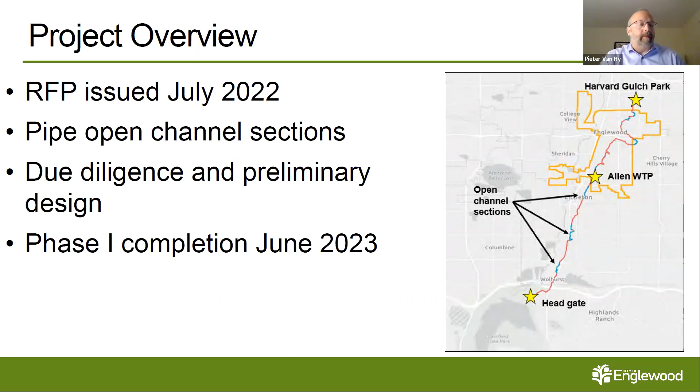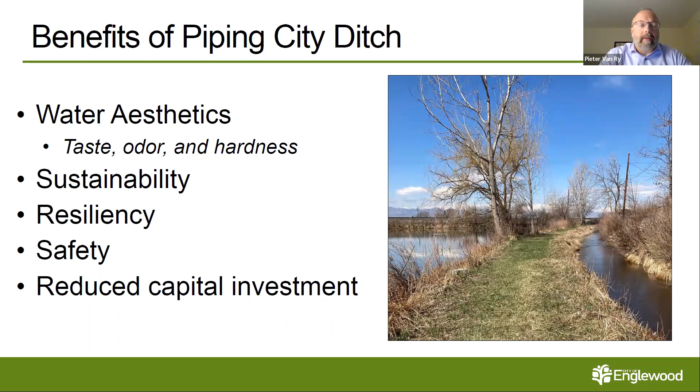Talked about this. So just as a review, it's taste, odor, and hardness, but we also have resiliency, safety, the operational costs, and just sustainability for keeping water in a piped enclosed environment. We lose less to evaporation. So those are the reasons why we're approaching this project this way. Here's what we looked at when we put out the RFP. It's basically nine areas. You can see what they are, but it's generally all the preliminary engineering aspects of a project. So initial alignment, right of way, property, things like that, analysis, preliminary design.

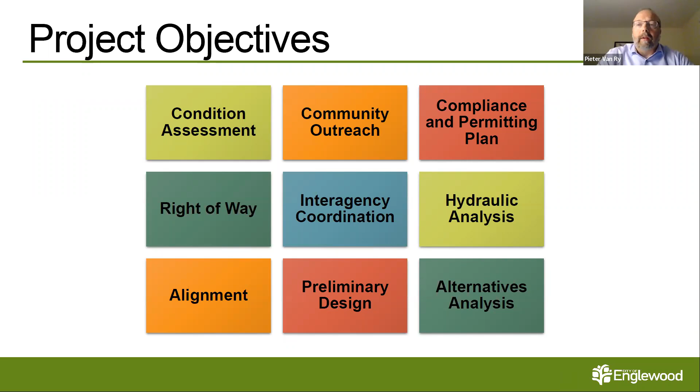But I want to highlight community outreach. So we have had a significant amount of interest in this project since we've talked about it, and so within this process is a number of community outreach meetings to work with the interested parties who would like to provide input on how this project advances. And this is the phase to do that in, as we start to come up with alignment ideas and possibilities for how this ultimately can be constructed to achieve the water supply goal. There could be other options, and we want to make sure that we have that opportunity to talk to those impacted stakeholders, most specifically the historic preservation societies who've expressed an interest in this.

We went through a selection process. Like I said, we did an RFP. We had 6 firms submit, and then we actually interviewed 3 firms. We interviewed Jacobs, Carollo, and HDR, and ultimately settled on Jacobs. They had what we thought was the best project team, best experienced project manager, as well as a really sound approach to how to accomplish this first phase and really look at those alternative alignments.

And they were the team that actually conceptualized the idea that when you go with a shorter straight line alignment, you save the cost of pipe installation, which actually might benefit those that are looking to protect the historic nature of the ditch. So, and I've specifically worked with the PM from Jacobs on a previous project at my previous organization, and it was a large diameter pipeline about 4 miles long, and it was very well executed. So we were comfortable after we went through the interviews that Jacobs is the correct engineering firm to complete this project.

We've also added to the original proposed base price $20,000. And what that's for is we anticipate immediately moving this into a construction manager, general contractor bidding approach, which is a different, we're going to talk about this a little bit later in the meeting.

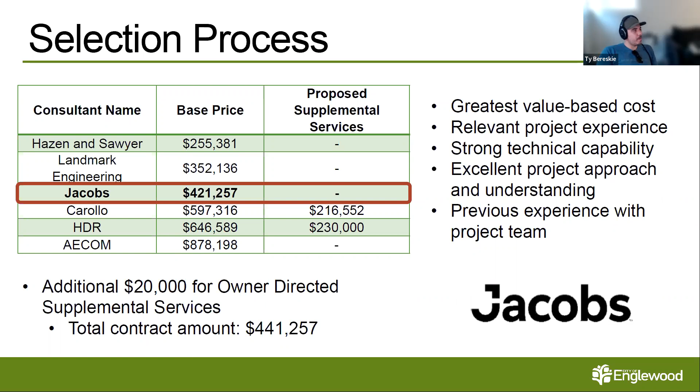Okay, thank you. Another question. I would assume that along the line there'd be some sort of pump stations. I mean, this isn't all gravity, is it? No, it is all gravity. Oh, interesting. Okay. Those are my questions. All right, thanks, Jim. And Ty, you put your hand down. I'm assuming you were asking something similar. Yep, same question. All right, that was mine as well. Any further questions? Okay.

Then could I get a motion to recommend City Council approve by motion a professional services agreement with Jacobs Engineering Group for the city ditch piping project in the amount of $441,257, including approval to execute any change orders to expend a 20% staff managed contingency in the amount of $88,252 for a total project authorization of $529,509. I move. Thank you. Can I get a second? I'll second.

Okay. Any further comments, questions? All right. All in favor, say aye. Aye. Aye. Aye. Opposed? All right. Motion carries. All right. On to item 5B, Peter. Okay, thank you. So this one is, I'm trying to resize my screen here.

So this is our annual process to renew our professional service agreements with Berg Hill, who's our water rights attorney legal firm, and Martin & Wood, who is our water rights engineering firm. And this is essentially what these two firms do, is they protect our water portfolio. And we've been under contract with them for many years. They have the history of our portfolio. And really, this is important for us to be able to, as water becomes more and more scarce, protect and optimize our water rights portfolio.

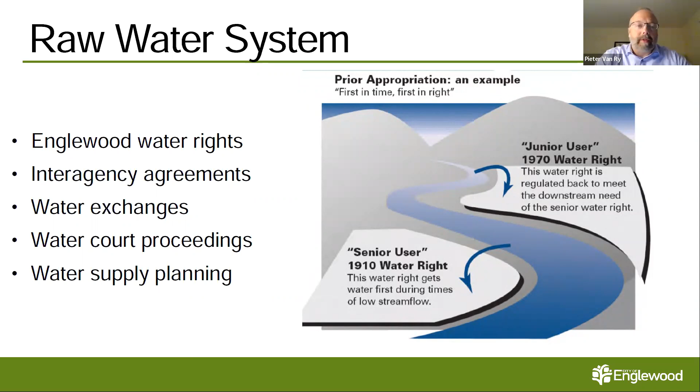So these two contracts are essentially the technical specific firms that work solely in the water rights space to help us accomplish those goals. I think I talked about all this, so we can jump ahead.

So really, why we keep with these firms, there's only so many of these firms in the Front Range, and so once you have a team that you work with, because of the historic nature and the multi-year approach to a lot of these cases and a lot of these issues, once you have a water rights legal firm and an engineering firm, you typically stick with those. It's not something where on an annual basis or every 5-year basis you go back out, because there's only so many of these firms.

And so once you have your team, you move forward as long as the value is being provided to the city. I think one of the things that has occurred over the last couple of years is we've taken a much more active role at the city in managing their work and managing their efforts. I know they appreciate that, because for many years they were essentially off on their own, protecting the water rights portfolio of the city with a pretty hands-off approach to that.

And so I think what it provides for us is a much stronger connection to what the internal staffing priorities and strategies are, with the supplement of the specific water rights knowledge that comes from these two firms.

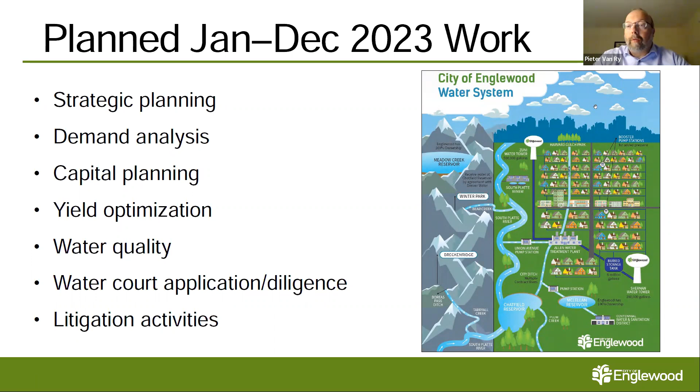So for July through December, we had anticipated 225 for Martin Wood and Berg Hill at 350. For January through December of next year, we anticipate Martin Wood at 400 and Berg Hill at 450. Keep in mind that these are estimated contract amounts. If we don't spend it, it just goes back to the water fund balance. So this is just an estimate based on what we think is a potential for this year. However, if we don't need to spend the money, we won't spend the money.

So if we're able to stipulate out of a court case, that saves a lot of money in court costs. And so we saved money this fall by not participating in that trial. But we have to anticipate that we potentially will. So this is how we came up with those numbers and what we'd be looking for in terms of renewing those PSAs. I'll open it up for questions.

Ty, go ahead. Hey, Peter, is there any scenario that you would move any of this in-house in the near future, or is it strictly contracted out? Is that the long-term plan? So I don't think we're big enough. I think that's the challenge: places like Denver Water and Aurora are really large utilities that I think have the capacity to bring this in-house in a way that allows for the full-time expertise to stay within the city for a long period of time.

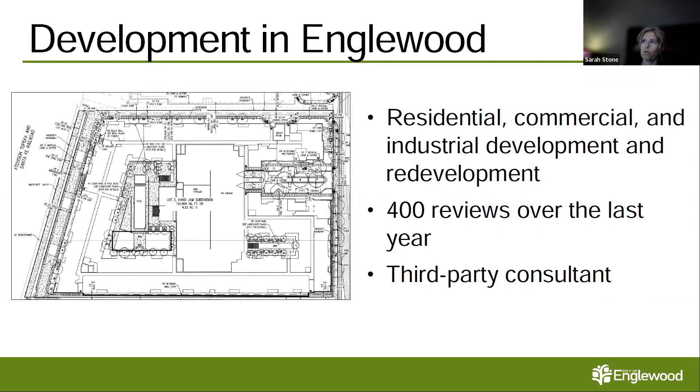And due to increasing workloads associated with implementing the critical capital improvements that we are planning for the water system, we've engaged with a third-party consultant to take over a majority of the workload for development reviews. So currently, the Utilities Department does not charge development fees to developers for any type of review related to the water and sewer system, putting this cost burden directly on current utility ratepayers and not on the developer. So these fees were designed with the intent to reimburse our internal and external costs and place the cost burden appropriately on the developer rather than on current ratepayers.

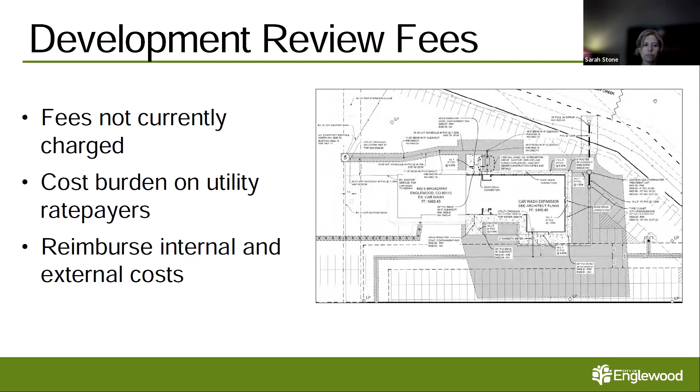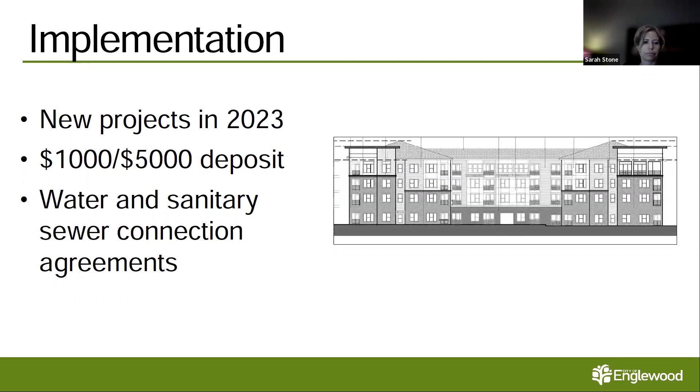So in summary, the number of fees that we're trying to add to the fee schedule for the city is intended to assign the costs really to appropriate users. So we're not subsidizing, excuse me, development review rates through the ratepayers, and accurate cost recovery is from the developer. With that, I'll open up for questions.

Sorry, go ahead, Jim. Yeah, I'm curious to know, would the standpipes in, let's say, a high-rise building be considered a hydrant then? I do not know the answer to that. Okay, are you talking about for fire flow protection? Correct, for fire flow or for water flow. I don't think that's a hydrant at that point in time.

I think that's a fire flow system, and those are pretty complex systems when you're looking at high rises. So they have to put an actual fire line in, and so there's a development review process associated with that. So when you're looking at that hydrant, what we're typically thinking is a typical hydrant as you would think of a hydrant, and testing that. Well, and actually the hydrant test is even before that development is placed.

We're trying to figure out what the pressure is at that particular location to understand whether or not the pressure is adequate to serve what that development will be. So in doing that analysis, I assume you'd probably figure out whether there's enough pressure to utilize the standpipe. Let's say we have that 14-story building going up on Emerson. I would think at the top of that building, that'd require a lot of pressure.

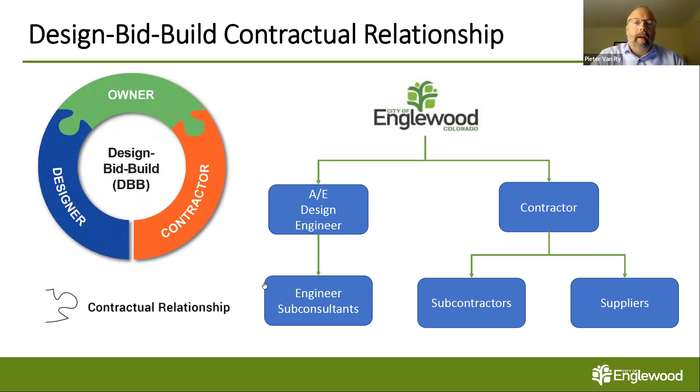But what changes is the timing on that. On the next slide, you'll see the way design bid build works from a timeline is, first thing you do is you select an engineer, and then you design the project from 0% all the way to 100%. And then you go out to the street and put a bid out for the street to bid on the project. After you receive the bid, you start construction, and you essentially spend the next period of time completing the construction.

So you start with a bid cost that is defined at the time. It's a hard bid at the time of submittal of those bid prices. And then through construction, you end up typically with a certain amount of change orders, because there were assumptions made by the design engineer that didn't involve a contractor's analysis, review, or understanding, and that results in change orders. If you've got really exceptionally well executed design, then you can minimize those change orders.

Additionally, you'll get change orders associated with timing of materials and delays in material delivery, things like that. And so the goal for this process is to get the design as completely understood and completed at the time of engineering, so that when it translates to construction, there's minimal change orders.

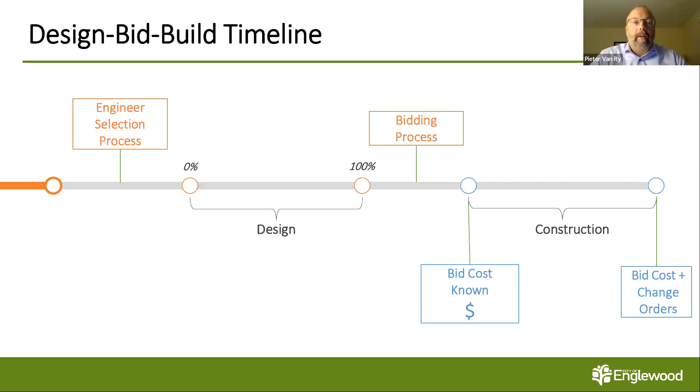And that works well sometimes, well, it works well often, but there are also other times it doesn't work so well. So another approach to construction that we are using more and more is construction manager, general contractor. And so it's a form of alternative delivery. So there's a large umbrella of contracting methods that fall under alternative delivery.

And there's design build, there's progressive design build, there's lump sum design build, there's construction manager at risk. There's a multitude of these types of different construction methodologies. The one that we're using effectively over at South Platte Renew, and have been for the last 3 years or so, is construction manager, general contractor.

And essentially it's similar in the sense that the city hires the design engineer and then hires the construction manager, general contractor firm. And then that firm bids out packages for the work as the design is progressing. And so it's an opportunity to bring in, if we go to the next slide, this will help with this.

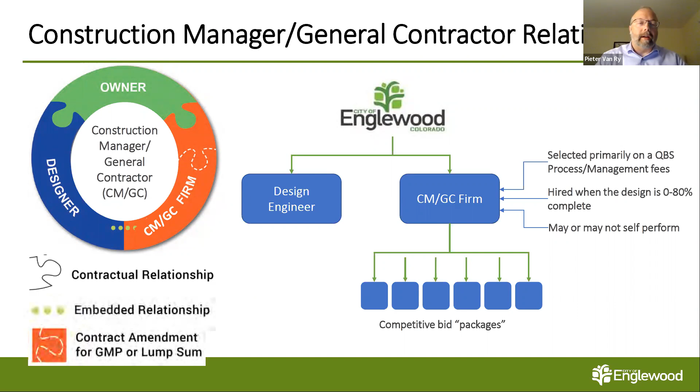It's an opportunity to bring in the contractor earlier in the process to help define and refine and value engineer the scope, and then eliminate the risk associated with unknowns as pricing is developed over the course of the design. And so what you end up with is what's called a GMP, or a guaranteed maximum price, at a point in time during the design process that the contractor feels like they have a complete understanding of the project scope and risks, and can then price that accordingly.

The other key relationship in here that's not on the slide is what's called an owner's advisor. And that owner's advisor is that third-party engineering firm that helps us ensure that the pricing and the bidding from the contractor is competitive and consistent with the market.

And so what these alternative delivery contracting methodologies rely on is what's called open book. And what open book means is they provide all their pricing information, and you can end up with a pricing estimate that has 5,000 line items associated with it. And for in-house staff to be able to understand the complexity of those line items, it's a lot for an in-house city to understand.

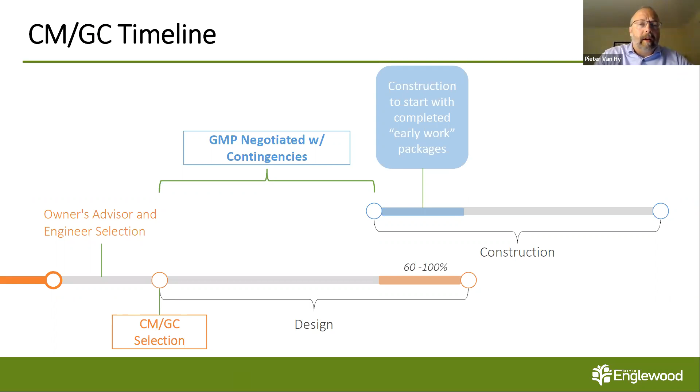we'll follow right behind with soliciting for a CMGC contractor, so that we can roll them into the project early on, so that we can start to have a strong project understanding, so that we can get the best pricing and the best scope for the project.

Some of the benefits that you get out of this is you get a much stronger partnership between the city, the contractor, and the engineer. You get less adversarial, because the relationship is established early on. There's a lot of owner control in terms of being able to refine scope as pricing is coming in.

Whereas with a hard bid project, we know our engineer's estimate, but you could send that out to the street and it could end up being 50% more than what the engineer's estimate is. What this does is it helps us progressively build those estimates over time to ensure that our scope that we're trying to get accomplished is fitting with our budgets.

Another area that this really more recently is helpful with is supply chain. So we have situations where there's equipment that typically has long lead times, normally 6 to 9 months for a lead time. It can be upwards of 18 to 24 months. And what the CMGC process does for us is it allows us to issue an early work package to get that equipment on order, so that we're not waiting 2 years for a piece of equipment to come in on a project that may only have a project duration of 18 months.

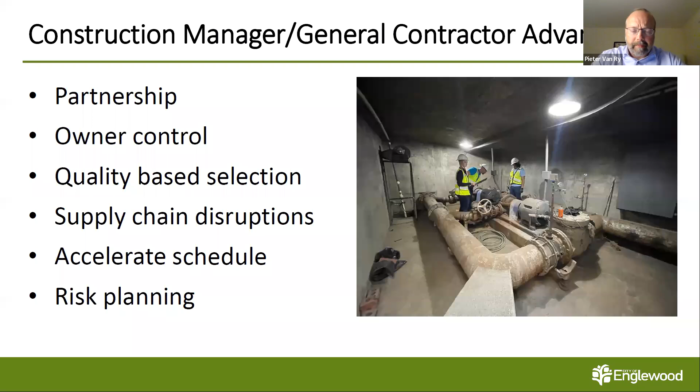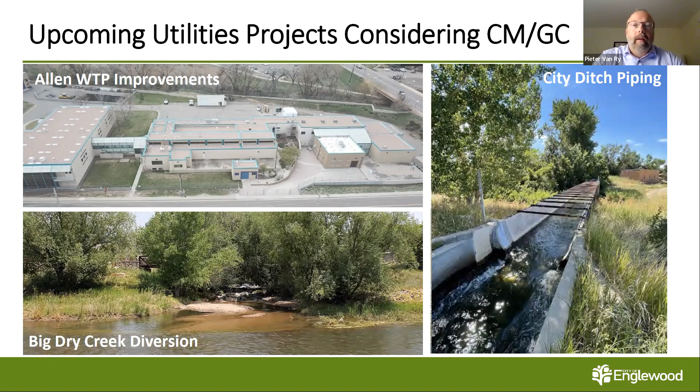So the challenge with this is these types of methodologies rely heavily on transparency and trust, because what you're doing is you're hiring a contractor before you have any idea what the price of the project is going to be, because you're establishing that initial relationship, and then you're building the pricing ultimately through the development of the design and initial construction of the project. And so that's why it's so critical to ensure that through the quals-based selection process we bring in contractors that understand our needs, and we truly understand their markups and their general conditions, and ensure that the relationship provides the best value once the project is actually at the point of construction. So I think that's the general overview for CMGC, and I just wanted to initially talk to the board about it because it is a new way of contracting than what the city typically has done in the utilities department.

Any questions for Pieter? Marjan, go ahead. Hi, Pieter. Thanks for that explanation. I just was wondering, so you were saying this kind of helps with their skills of educating us and getting the scope to decrease the risk and then kind of forecast what kind of risk is coming. But when you were saying that this kind of gives you some sort of insurance, how much is that insurance covering? Let's say they were predicting that the cost of certain piping would be a certain amount, but then it turns out to be higher than that.

Since they're offering their skills, and I'm pretty sure they're getting compensated for that, what kind of a comeback do you have? I mean, okay, you give us this expertise, but then when in future it comes out, how do they handle the situation if it's not as what they forecast? Do they end up paying for it, or does the contractor end up paying for it, or does the City of Englewood end up paying for it?

So that's what the process actually defines, and so it's an evolution through the design and estimating of the project. So essentially, what happens is we bring the CMGC contractor on board, and they have a pretty small fee to participate in that design process. What they do is they provide us a GMP at 30%, and that 30% has a lot of assumptions and associated risk built into that number.